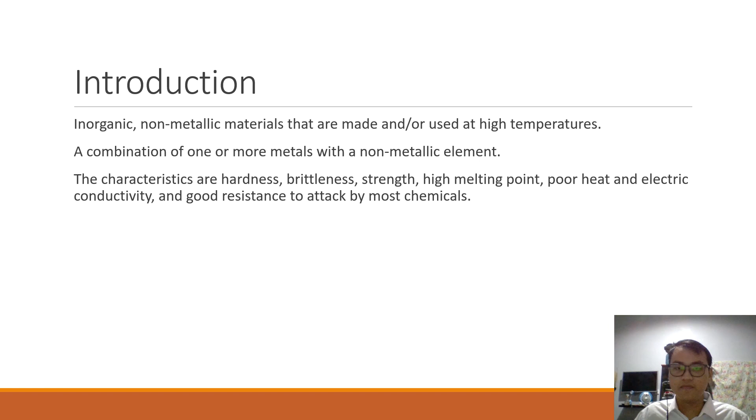The main characteristics of ceramic are hardness, brittleness, and strength, high melting point, poor heat and electric conductivity, and good resistance to attack by most chemicals, particularly oxygen. Silicates are by far the most important of the silicon compounds, and they are the basis of the entire glass, ceramic, and cement industries.

In the following is presented a brief survey of mineral silicates outlining the more important structural silicates. The three main types of structures are: first type is discrete anions in which either the SiO4 or silicate tetrahedra are present individually or a limited number of them are combined in ionic groups.

The second type is extended anions in which the silicate SiO4 tetrahedra are linked into chains of indefinite length or sheets of indefinite area. The last is three-dimensional networks formed by the complete linkage of the SiO4 tetrahedra in all three directions.

Three main types of discrete anions are: individual SiO4 tetrahedra present, the simple silicate ion in which a central silicon atom or ion is surrounded tetrahedrally by four oxygen atoms or ions. In fact, the SiO4 tetrahedron constitutes the basic structural unit in all silicates and may be variously represented according to convenience as shown in figure A, B, and C.

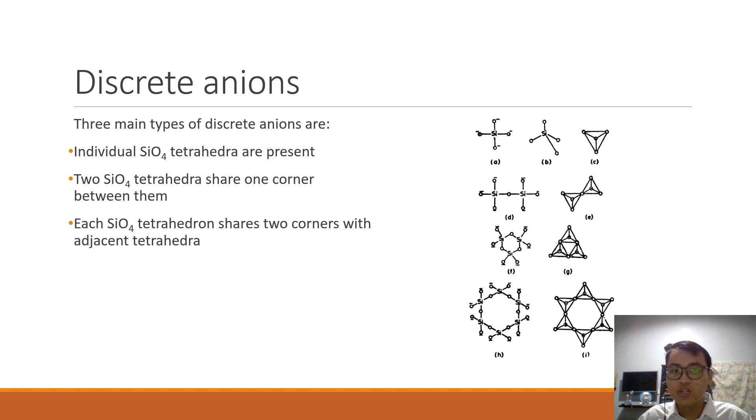Similarly, a cyclic arrangement of 6 tetrahedra will give the discrete anion Si6O18, shown in figure H and I. Next is extended anions. Three main types of extended anions are: first, each SiO4 tetrahedron shares 2 corners with adjacent tetrahedra.

The linkage of this type involving an indefinite number of SiO4 tetrahedra leads to chain formation of the composition SiO3, or called metasilicate, shown in this figure on the top. This structure is characteristic of the group of minerals known as pyroxenes.

Alternate SiO4 tetrahedra share 2 and 3 corners with adjacent tetrahedra. Extended anions comprising double chains formed by this type of linkage have the composition Si4O11, or so-called metatetrasilicate, shown in this figure on the top right. This structure is characteristic of the materials known as amphiboles.

Thus, in contrast to pyroxenes, the anionic frameworks of amphibole minerals are built of double chains. Last type is each SiO4 tetrahedron shares 3 corners with adjacent tetrahedra in one plane. This type of linkage leads to the formation of the extended sheet of linked tetrahedra with the ionic composition Si2O5, as indicated by the arrangement shown in this figure on the bottom right.

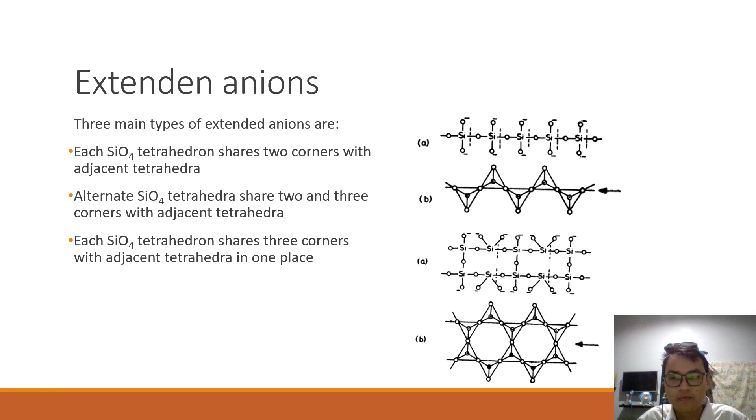Okay, the last is 3-dimensional networks. Each SiO4 tetrahedron shares 4 corners with adjacent tetrahedra. The sharing of each oxygen atom at the corner of every SiO4 tetrahedron results in 3-dimensional lattices of silicon dioxide.

Next one, we discuss refractories. Refractories are non-metallic materials of construction capable of withstanding high temperatures without appreciable deformation under service conditions. This property is called refractoriness and is generally measured by the softening or melting point of the material.

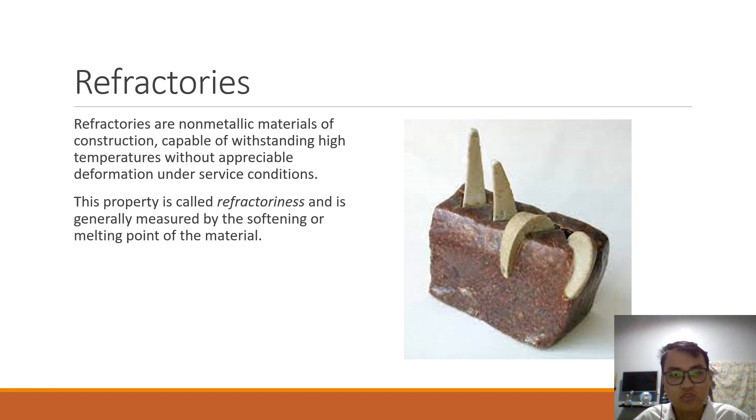A common method of determining the fusion point is by comparing the bending characteristic of a small cone of the material with those of a series of standard pyrometric cones when they are all heated in the same furnace. The result is reported as a pyrometric cone equivalent, or so-called PCE, of the refractory, which is the simple number of the cone that most nearly corresponds to the test cone in a furnace at the time of softening.

Application of refractories. In selecting refractories for particular applications, several other properties such as dimensional stability, resistance to spalling, and resistance to different types of slag also need to be considered. Dimensional stability defines the resistance of the materials to any volume changes which may occur on prolonged exposure to high temperature. Dimensional changes of a refractory brick can be either reversible or permanent, irreversible.

Reversible changes are directly related to the coefficient of thermal expansion, while irreversible changes occur due to phase transformations resulting either in contraction or expansion. Spalling refers to cracking, splitting, or flaking of the materials when subjected to sudden temperature changes, also called thermal shock.

A refractory may spall in a variety of ways owing to one or a combination of causes, including temperature gradients in the brick due to uneven heating or cooling, which set up stresses of such magnitude as to cause failure. Compression due to volume expansion of a whole structure of refractories from a rise of temperature sufficient to cause shear failures. Difference in coefficient of thermal expansion between surface layer and the body of the brick brought by service conditions great enough to cause breaking off of pieces.

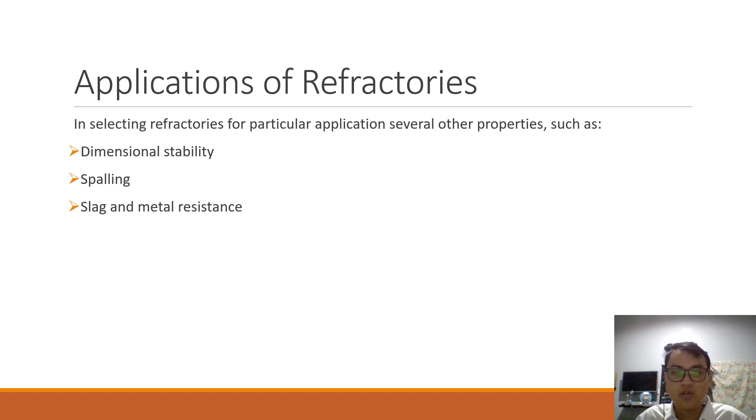Slag and metal resistance. It is essential that refractories should not react at high service temperatures with the substances they will be in contact with.

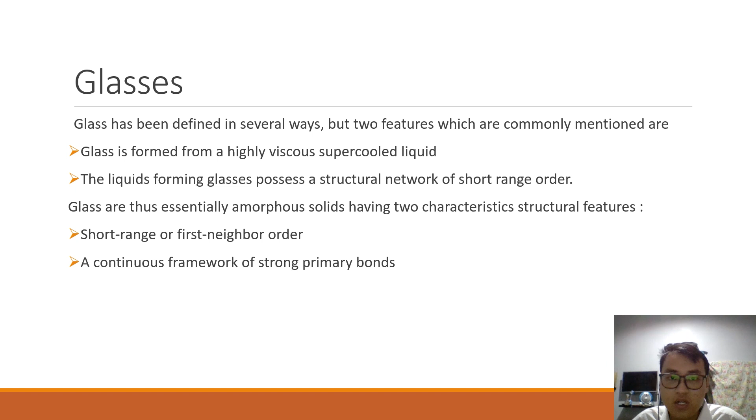Next, glasses. Glass has been defined in several ways. The two features which are commonly mentioned are: first, glass is formed from a highly viscous supercooled liquid, and two, the liquids forming glasses possess a structural network of short-range order. Glasses are thus essentially amorphous solids having two characteristic structural features. First is short-range or first neighbor order, and two, a continuous framework of strong primary bonds.

For the formation of an oxide glass, four simple rules must be obeyed. Considering an oxide AxBy, these rules may be stated as follows. An oxygen atom should be coordinated with not more than 2 A atoms. This rule singles out those oxides which develop network structures. The coordination number of A, in other words the number of oxygen atoms surrounding each A atom, must be small, 4 or less. This singles out those oxides with stronger bonds.

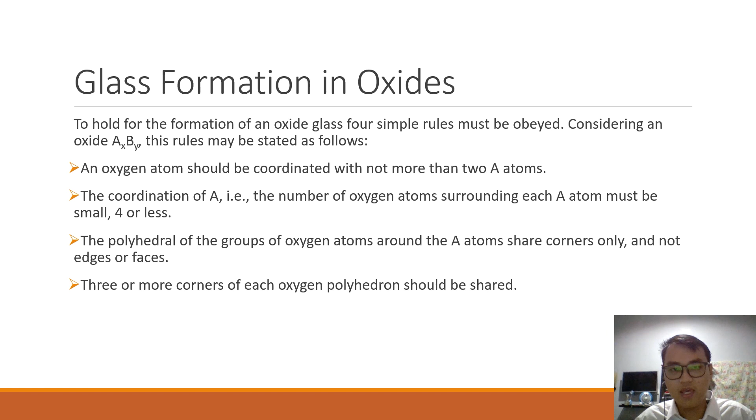The third rule is the polyhedra of the groups of oxygen atoms around A atoms share corners only and not edges or faces. Three or more corners of each oxygen polyhedron should be shared. This rule ensures development of a network structure. Relatively few oxides meet all these requirements. It is impossible for oxides A2O or AO, where A is a metal atom, to do so because they lack an adequate number of oxygens to form a network. The A2O3 oxides can form a network only if the A atom is small enough to permit a triangular oxygen polyhedron.

The unusual characteristics of glass, namely its chemical stability, inherent transparency, hardness and brittleness, and its poor conductivity to heat and electricity, are the consequences of its composition: the existence of strong covalent bonds between the atoms and the lack of crystal structure. Glass is immune to oxidation attack because it is fully oxidized. The basis for the transparency of glass is its lack of free electrons, unlike metals, and its homogeneous internal structure, typical of liquids.

The lack of free electrons severely restricts the absorption of light energy, while the absence of grain boundaries, unlike in polycrystalline materials, rules out loss of light by reflection inside the material. Since glass has no crystal structure and the atoms are bonded by strong covalent bonds, the phenomenon of slip cannot take place, and glass exhibits a very high compressive strength.

Potentially, the tensile strength of glass should also be very high, though in actual practice, the strength is only a hundredth to a thousandth of the theoretical strength, and glass is brittle. These sources of weakness, as experiments have shown conclusively, are primarily due to microcracks, tiny imperfections in the structure, which are present in any glass article, no matter how carefully it is made, and which can be augmented by abrasion during handling.

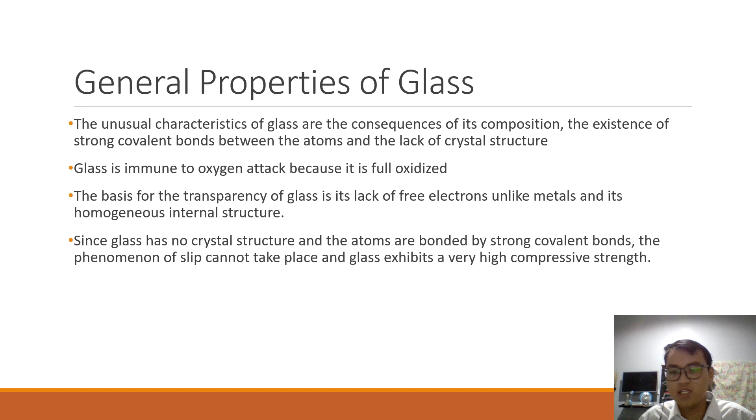These minute cracks or imperfections in glass act as stress raisers, permitting stress concentration to localize and exceed the bond strength between atoms to produce bond rupture. However, unlike tensile stresses, compressive stress can be transmitted across existing cracks without stress concentrations. As a result, glass is stronger in compression than in tension. And this is true for brittle materials in general.

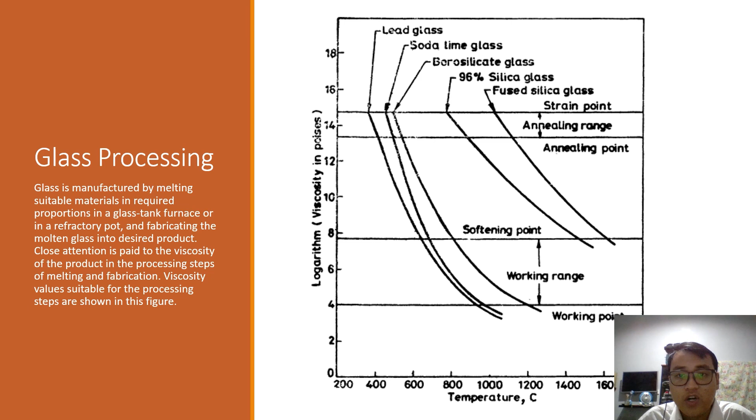Different types of operations require different viscosities; thus fast operations such as production of light bulbs require a relatively fluid glass, whereas the drawing operation on a heavy glass sheet requires a viscous product. Four most important uses of glass are the packaging, building, engineering, and electrical industries. The property that makes glass an ideal material for packaging is its chemical stability. Glass in almost every imaginable form is used in enriching buildings. While much of the glass used in modern building is in the form of flat glass, there are many other ways in which glass finds effective use in buildings.

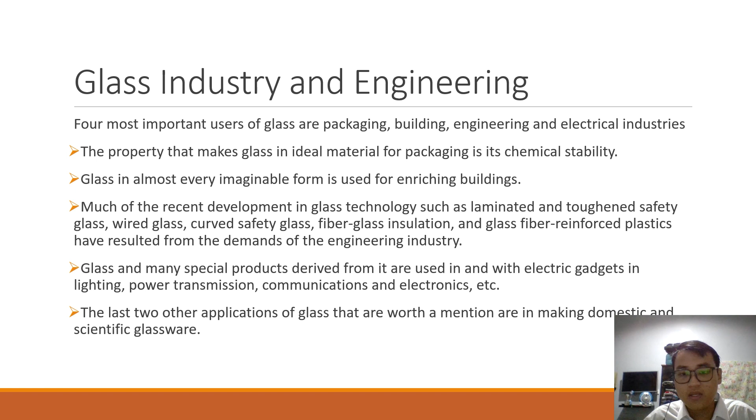Much of the more recent development in glass technology such as laminated and toughened safety glass, wire glass, curved safety glass, fiberglass insulation, and glass fiber reinforced plastics have resulted from the demands from the engineering industries. Glass and many special products derived from it are used in and with electric gadgets and lighting, power transmission, communications, and electronics, etc. In fact, without glass, many applications of electricity would be impossible. The last two other applications of glass worth mention are in making domestic and scientific glass.

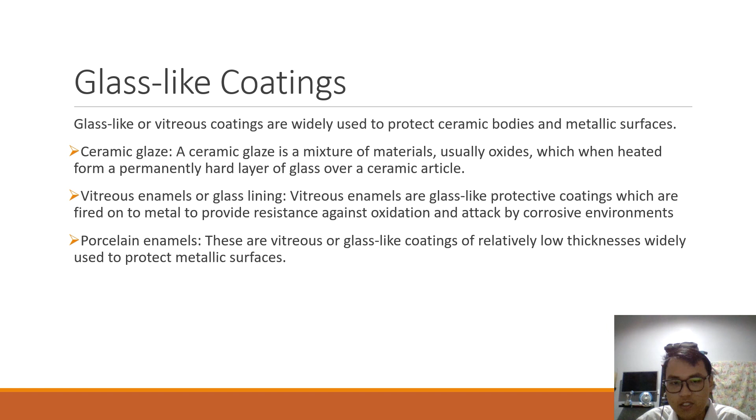Glass-like coatings. Glass-like or vitreous coatings are widely used to protect ceramic bodies and metallic surfaces. Ceramic glaze. A ceramic glaze is a mixture of materials, usually oxides, which when heated form a permanently hard layer of glass over a ceramic article. Vitreous enamels or glass lining. Vitreous enamels are glass-like protective coatings which are fired onto metal to provide resistance against oxidation and attack by corrosive environments. Porcelain enamels. These are glass-like coatings of relatively low thicknesses widely used to protect metallic surfaces. Ceramic coatings are similar in nature to enamel coatings, but they are characterized by much higher maturing temperatures and so are used in applications where high temperatures are encountered.

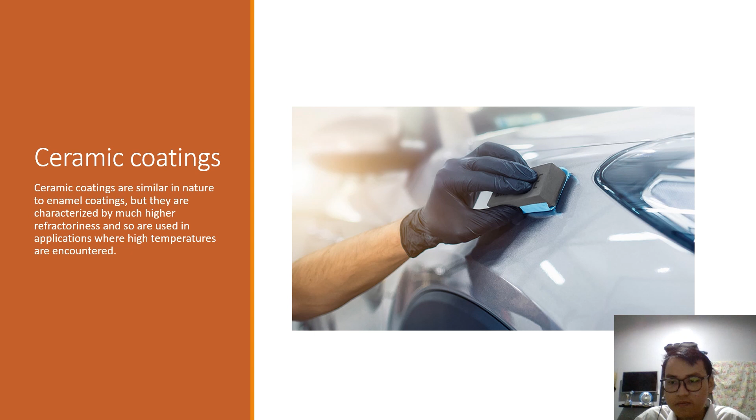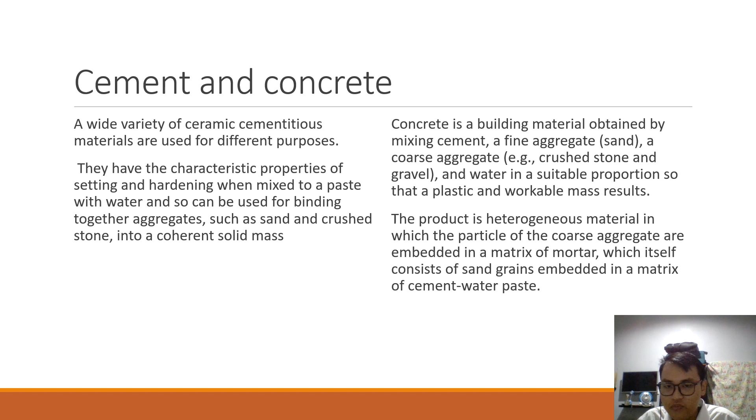Next is cement and concrete. A wide variety of ceramic cementitious materials are used for different purposes. They have the characteristic properties of setting and hardening when mixed to a paste with water, and so can be used for binding together aggregates such as sand and crushed stone into a coherent solid mass. Concrete is a building material obtained by mixing cement, a fine aggregate, for example sand, and coarse aggregate, for example crushed stone and/or gravel, and water in a suitable proportion so that a plastic and workable mass results. The product is a heterogeneous material in which the particles of the coarse aggregate are embedded in the matrix of mortar, which itself consists of sand grains embedded in the matrix of cement water paste.